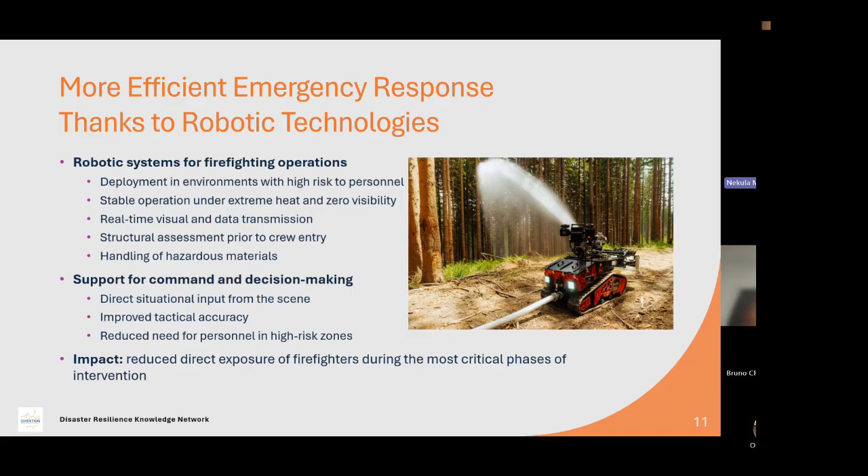I have to say that robots are important for me for two reasons. If I'm thinking about robots which are necessary to set up during interventions, I am sure that we need, for our better idea and better working at the scene, two different platforms of robotic systems. The first platform is a small platform with possibility to have real-time visual and data transmission, also possibility to see by camera and thermal camera.

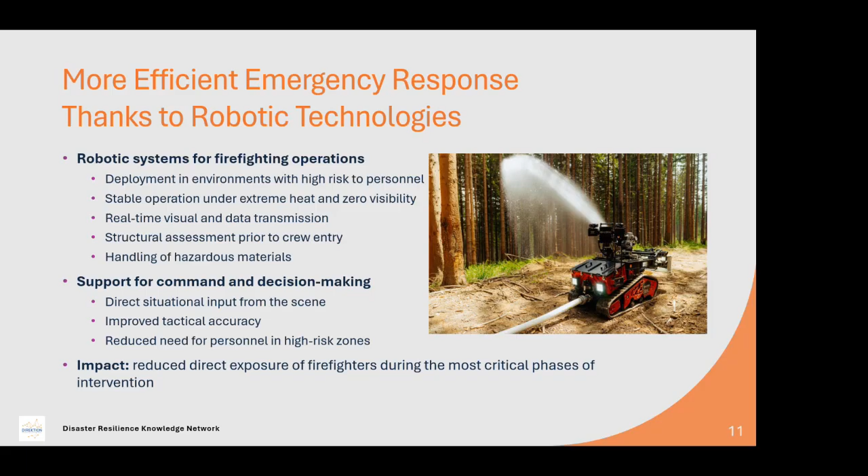And after that, use also the bigger brother - for example, a robotic system which is able to support the deployment of units by possibility to have a big nozzle to extinguish fire, also move obstacles, and try to improve or support moving, for example, injured people, and other tasks which are not able to be provided by the small robotic systems.

For us, it means that we try to do our work by clear operational and economic value. It means that we try to save time, reduce damage by fire at the scene, have lower risk for firefighters, and also try to have feedback from new data capabilities. It means that if there is data or possibility of pictures, and we are able to accept these pictures, we are able to bring better understanding of the situation.

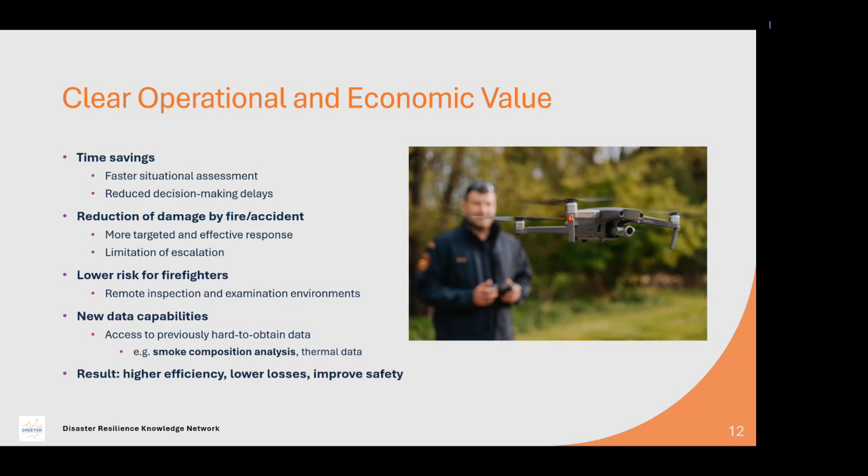We use drones during our interventions. It's standard this time, and I have to say that during the time we are trying to develop or improve our responsibility and cooperation with robots, it looks very good because in many interventions we are able to better do coordination and development of, for example, cooperation between drones and robotic systems.

We try to set up autonomy of the data system because we are aware that it's dangerous if the system is open to outside sources. So we try to set up a system covered by a special system with accessibility only into our net, and not possible to have an impact from outside on our net. This is the reason why we are very aware about the dangerous situation that can be caused if somebody is trying to reach the information and data we have during an intervention.

Of course, we have to be able to challenge new possibilities, have a special idea how to cooperate between drones and robotic systems, and have not only a view of the picture from the air, but also how people can see the situation around us. So every piece of information is connected to one system and presented to a commander for a better idea of the situation. It brings solutions, and most importantly the results mean that we are flexible and resilient. We have robotic systems and drones which are also resilient, meaning we can better support all emergency situations and operations.

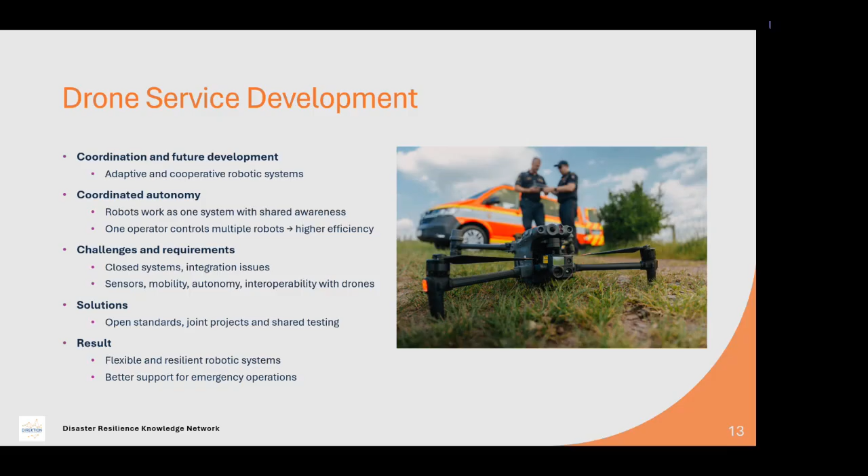Our current technology used by the Fire Rescue Brigade of the Moravian-Silesian region is that we use 35 drone pilots with this equipment. We use drones for training, for intervention, and also cooperate with different departments who are responsible for using them. If somebody needs to investigate a situation at the fire or after the fire, they use a special part of that equipment. If we try to get a fast track or fast picture of the situation, we use a slightly different one. If we need analysis inside buildings, we use a special construction of drone to be able to use it inside the buildings.

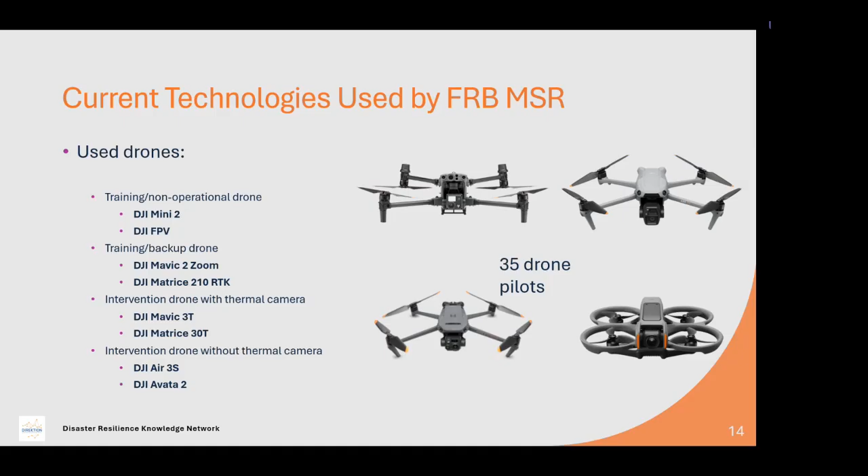What is the idea to improve our situation now? We are currently responsible in the area of drones, but we are not able to support our intervention with robotic systems - robots able to move on the ground and bring the same feedback as drones. Now we are thinking about two platforms. We would like to have a small one with camera survey and thermal camera, and a big one with the possibility to transport material, extinguish fires, transport injured persons, load special equipment, and push or pull obstacles. Beside that, it's necessary to have also a small one with the possibility, for example, to load a bottle, as you can see on the right picture.

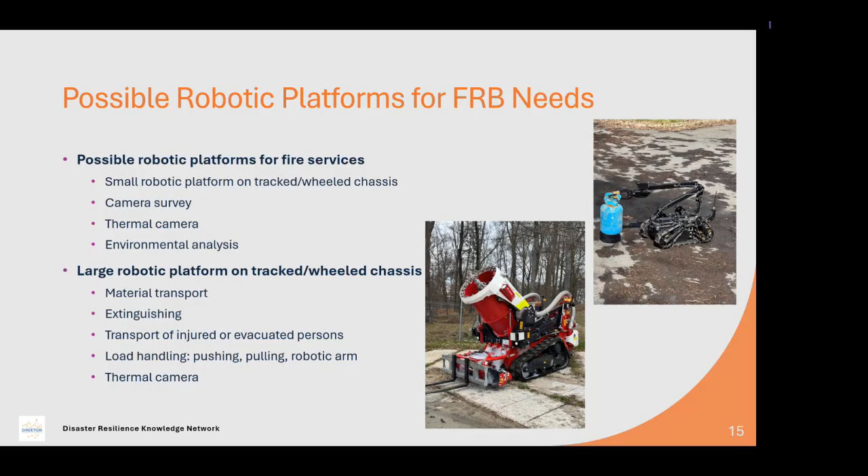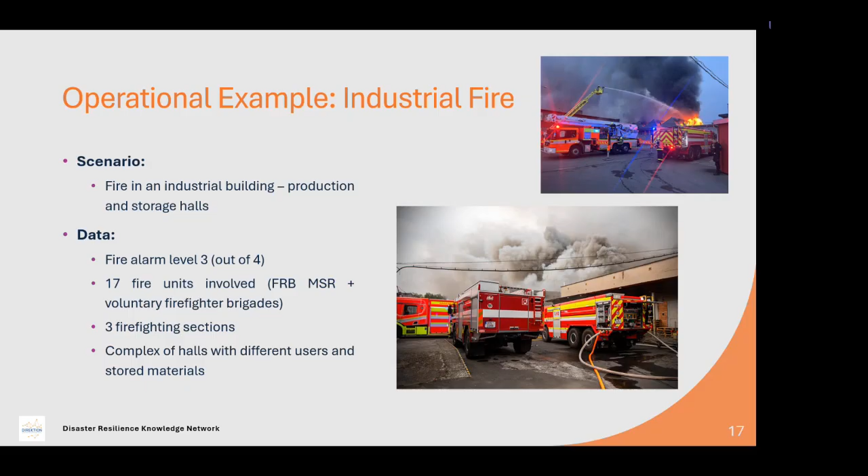I have a few examples of how to improve or do better in deployment of units with robotic systems, because we had a few interventions recently when the situation could have been supported by a robotic system. On only one occasion did we use a robot from colleagues in Slovakia to support fighting a fire, which I will also show in this presentation. But the first example I'll present is an industrial fire - we had a fire in a storage hall with 17 fire units responding. The place was separated into three firefighting sections, and this is the main reason we needed pictures or analysis from drones - it brings a better overview of the situation.

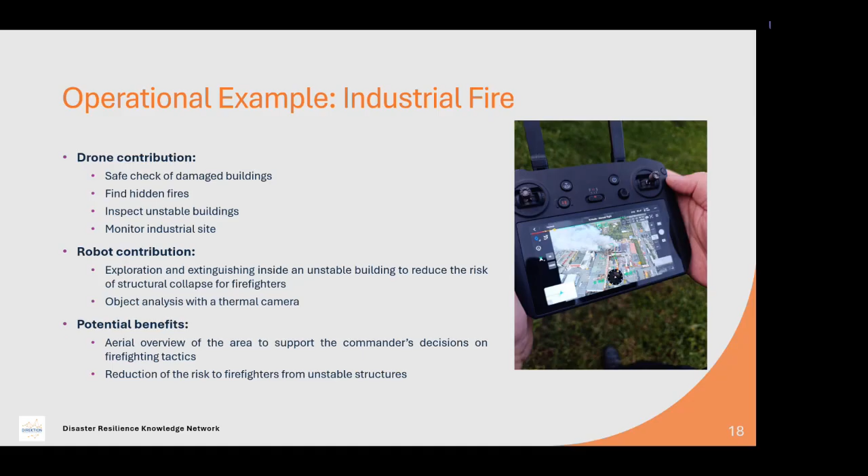What could be the contribution of robots? If we are able to explore these robots at the scene, we can be more successful in increasing the possibility of safety and security of that intervention. Also, unstable buildings can be dangerous for firefighters, and robots have a possibility to move something without firefighters needing to reach the people in person. These are the reasons why we think the robot is needed.

Another example is a forest fire, when we had 19 fire units involved, also drones at the scene, but no robotic system. In this case, the robot can bring an idea how to move nozzles, how to move hoses at the scene, and make it possible to continually extinguish the fires in cooperation with firefighters at the scene.

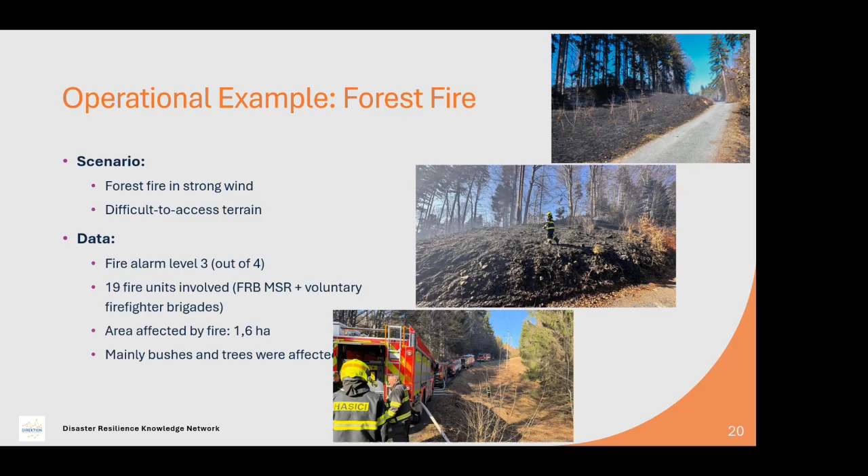When we use drones, we have a possibility to predict the situation, for example with wind, or to have an idea about moving firefighters at the scene. It also supports people who don't know about the situation and who are able to reach some place at the scene, supported by drones.

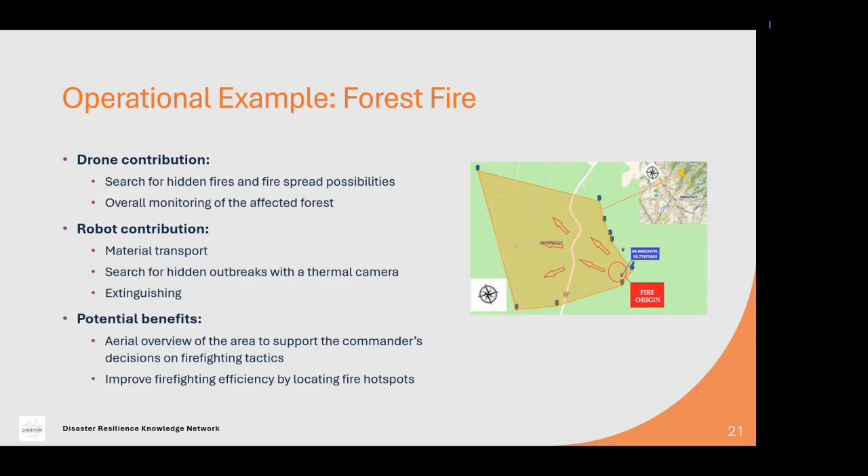We know that if we can also use robots, we can use them for transport of materials, searching for hidden places by thermal cameras, and also for extinguishing fires.

A situation with a huge fire of benzene was supported by drones, and after our request to colleagues in Slovakia, it was supported by the Shark system from our Slovak firefighter colleagues and these robots. There were 38 fire units and the situation was very dangerous. That was the only way how to continually check the temperature of the benzene in the tanks and have continual information about the situation. That was very important, and that's the reason we were able to support our firefighters with robotic systems.

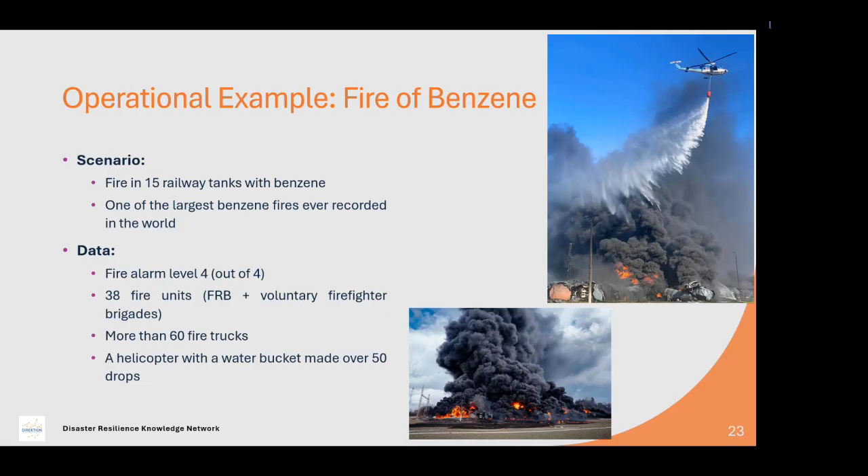After that, beside the thermal camera inspection, we used drones for overall monitoring of the situation, and the robot at the scene was used for transport of material. The benefits are visible: the firefighting robot was used to reduce risk mainly for firefighters.

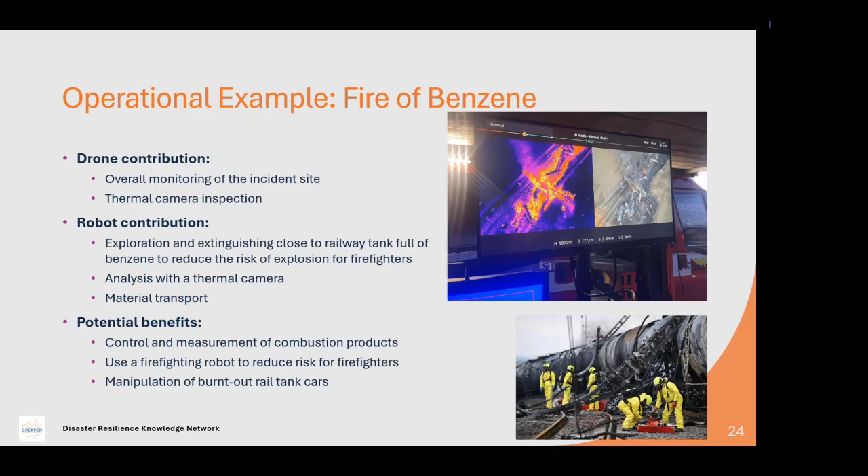One example, and a question for me and also for providers and producers of robotic systems, is the idea of how to provide deployment of units in connection not only with drones but also in connection between drones and robotic systems.

Beside that, we had a huge fire in a complex of buildings. There were 28 fire units, and the problem was that we had to cut the roof of the buildings, because under the roof the fire was spreading through holes, and there was no possibility to stop the fire and extinguish it without doing that.

The drone supported the picture and imagination of what happens or what can happen, and how to effectively use units at the scene, cooperating with the possibility of drones.

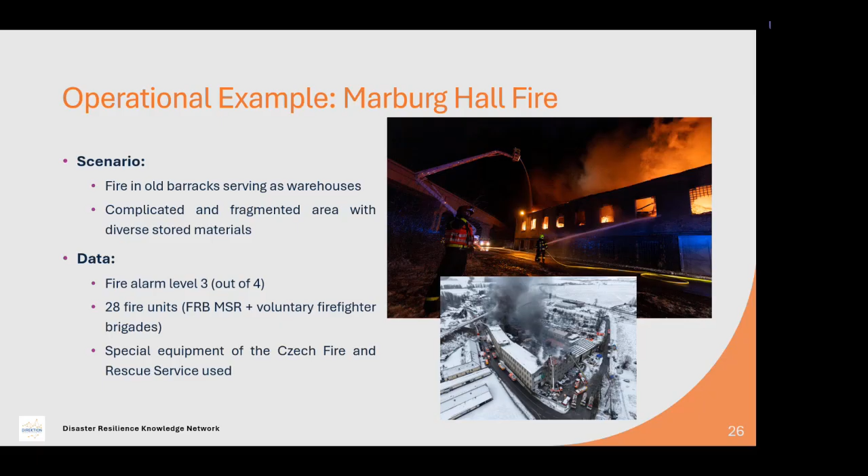Of course we didn't have robots at the scene, and if we had the possibility to set up robots, it could help extinguish fire in the middle of the place between buildings, because there was huge temperature and it was not possible to use nozzles in cooperation with firefighters there. It was only possible to have monitors on the ground and extinguish fires in that place with these static monitors. Of course, robots could help this situation by increasing the use of water and foam in that place.

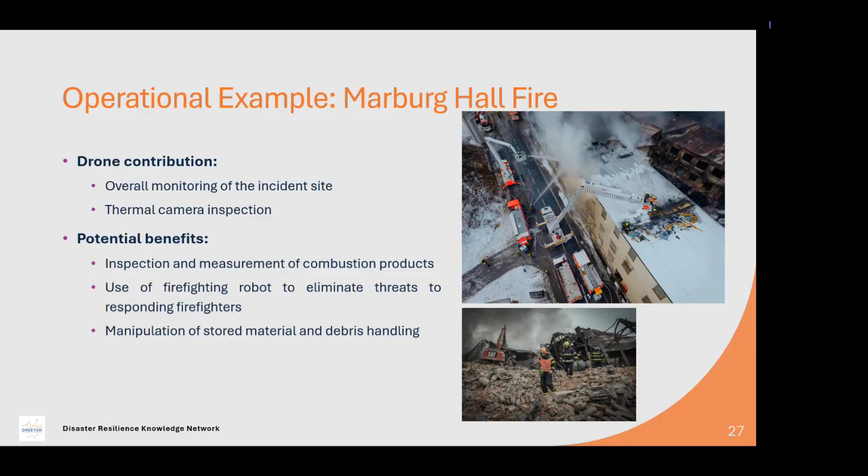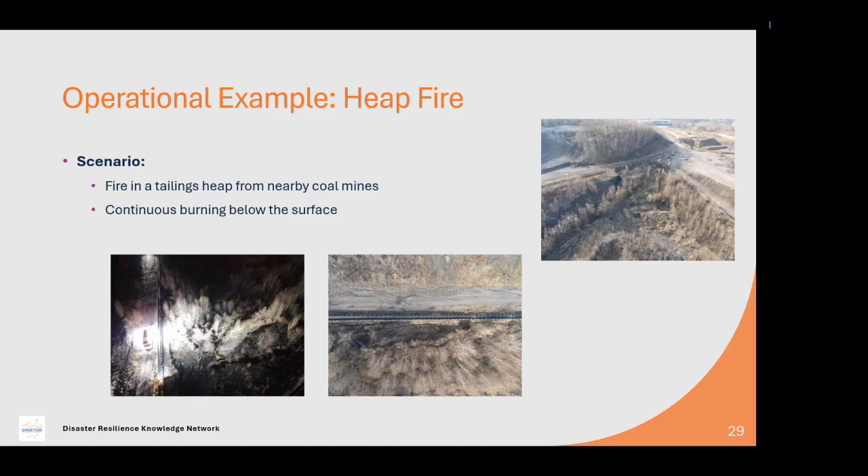The last example of using robots is one place where we have a continual fire of a heap, a fire in a tailing heap from nearby coal mines. It means the fire is underground, and on the surface there is a temperature of 140 degrees, so it's possible to have a fire in that place at any time.

This is the idea of how to cooperate with drones and robots at one place, if there is a possibility to have continuity of drone monitoring, and after that continuity, deploy robots on the ground to use them to extinguish fires if drones are able to inform you about the situation that fire is in that place or another place.

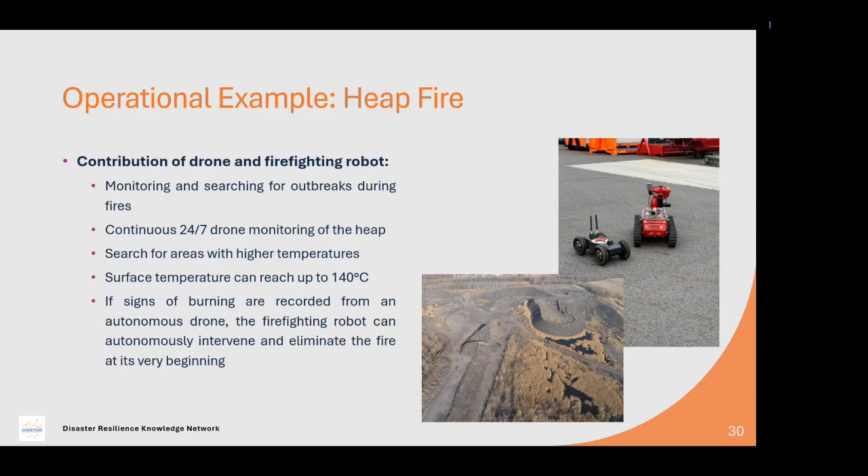Because it's a huge area, it's not possible to deploy the fire rescue service at all times and continually check that place. This is the reason why deploying drones and robots can be very successful also in this place when we have to use firefighters because of fire.

What is the possibility of bringing some new idea for us from providers or developers? It seems that if we try to cooperate between providers who are able to support drones and providers who are able to support robots, we would like to find connection also with some feedback from firefighters.

This is the idea how we can bring something new for fire rescue service, and this is the reason for me in the Czech Republic to bring something new. For example, for fires, for dangers of next fires, how to cover that situation, have an overview, and extinguish fires by drones and robots in one whole system. Thank you, Direction, for that possibility to develop that idea, and thank you for the opportunity to present. Thank you.

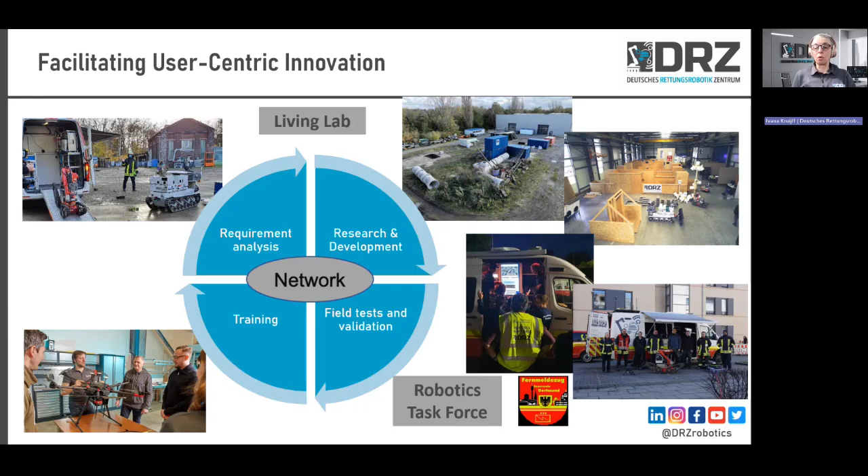We also organize training for first responders, primarily to learn from the experience of others, to build capacities to use robotic systems. And from all these activities, it's a circle, right? We bring it again into knowledge about what is needed, what is not yet solved, and help developers elicit the development of further useful systems. So that's kind of the main activities of DRZ.

And why do I believe that DRZ is extremely important to have? Because, and Martin's talk already showed some examples of that as well, we have quite some innovative concepts and demonstrators available on the research side, and also on the development side in companies. And yet still not all that there is gets into practical use by first responders. This can have various reasons. Not every idea works, but it may also be that the fit for the

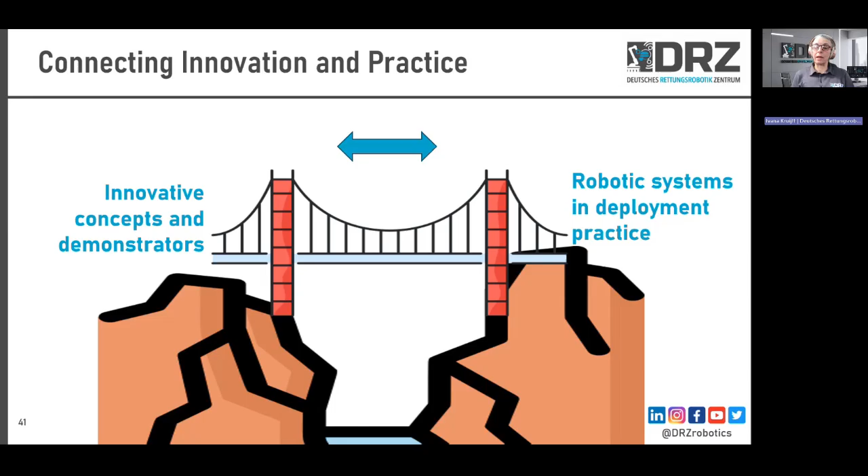operational constraints is not yet worked out, or not as it should be. Or it could be that the training is not available, or that the systems are not doing exactly what they should be doing. That's why we think our work is important to help bridge this gap, in both directions: that developers understand what end users need, and that end users get a better idea of what there is.

Now, talking a little bit about where we are nowadays, it's a big task, because disaster response robotics contains or envelopes many topics. The pictures there show some of the demonstrator systems that we have at DRZ. Martin has already shown many further examples. I just wanted to say, in first responder practice, and again Martin's talk was a perfect example of that, drones are already becoming very common.

I can add that in Germany there are about 550 drone units. The current practice is mostly that drones are used for live images in teleoperations, some partially autonomous missions, but much more is possible.

When UGVs are concerned, Martin talked very nicely about the potential uses and current uses, and clearly the interest is growing. If you're familiar with the technology adoption curve, then we are...

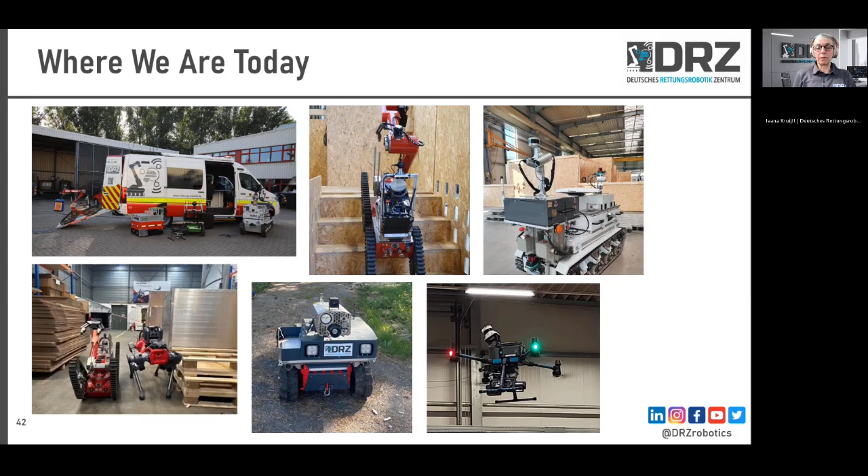There's too much to do a thorough overview in such a short time, but I'd like to get back to this issue of listening to customers - my core message that I want to bring across today: to listen to first responders.

Here I'm borrowing a slogan from Amazon, who are really famous for their obsession with customers - they talk about listening to customers while at the same time knowing your technology and having a vision, bringing these three elements closely together. So I want to talk about some of the ways we work with first responders.

Starting very early in the design phase, it's possible to use methods such as data-sheet interviews, where you present the potential technology being developed and discuss the uses on that basis, or carry out tabletop exercises, as we did early in the Karma project.

This is very useful for initial exploration, but because it's imaginary, there is a danger of being too idealistic on one hand or too skeptical on the other.

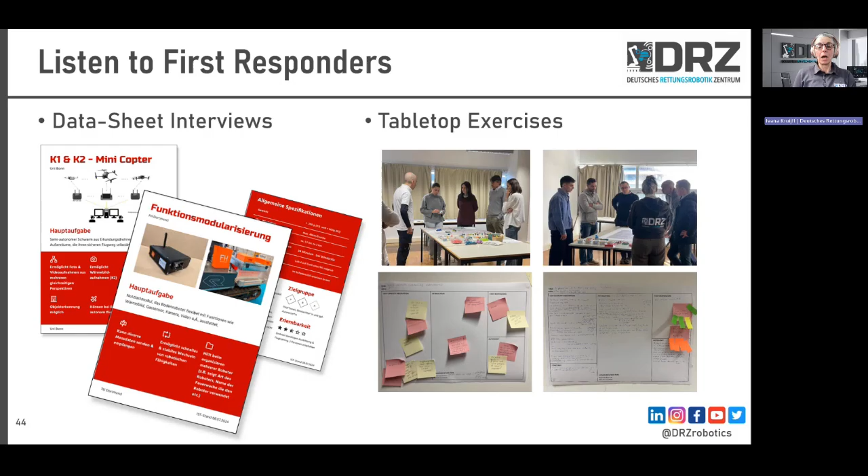In doing these kinds of experiments, there are various ways in which end users and developers can work together. The most desirable mode of operation is that the first responders get hands-on experience with the technology. They are actively using it and actively experiencing it. That is, of course, best.

One has to realize that for this, typically extensive training is needed, so that the first responders really become, some as novice users, but then their experience grows with every run. They need to know some theory and get practical hands-on experience. There is also a danger that when you run an experiment this way, some more advanced features do not get used because the first responders are not yet that familiar with it.

That's why sometimes it's good to do a combination where more experienced users are actually demonstrating the technology, or are kind of accompanying the active use by the first responders by advising them. So that's a little bit when the first responders are just observing the use, then it's a more indirect experience, but it's still good experience, better than nothing, right?

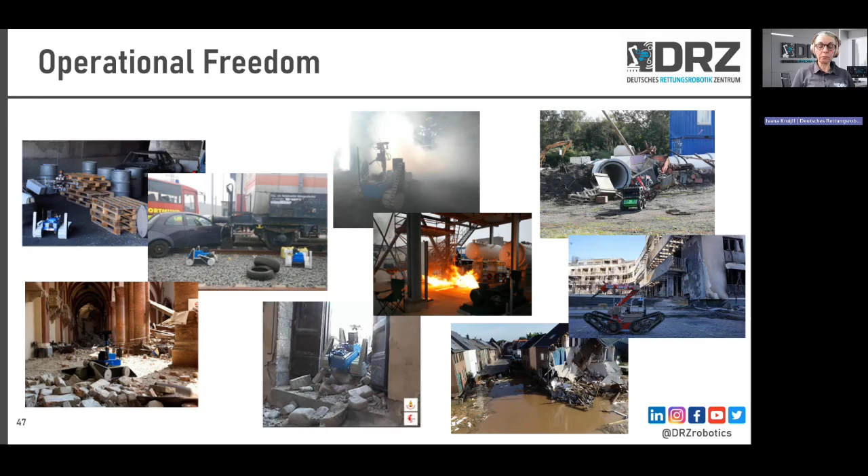So this is much more exploratory. It has the danger that, as I said, some technology may not be used because it just doesn't occur to apply it. But then again, it really shows how systems would be used in a more exploratory fashion at the operational level. And these are the experiences that I wanted to share, the possible ways of working together between research and first responders in a very close fashion, and some of the considerations one needs to have when planning such activities.

So let me repeat once more that the current state of development is that robotics for first responders is progressing, and to a great degree is already available, but adoption remains uneven, and there is room to do much more.

The main challenge from my viewpoint is not only technical performance, but the operational fit. I and some others really strongly believe that real progress requires early and sustained collaboration between developers and first responders, and that practical exercises are very demanding but are essential if we want to make this progress. Let me close by saying our organization DRZ exists exactly with the aim to make such collaboration structured, continuous, and productive, and we are always there to help if anybody wants to apply this kind of methodology to advance their research and development. So thank you for your attention, and I hope I was not too long in presenting.

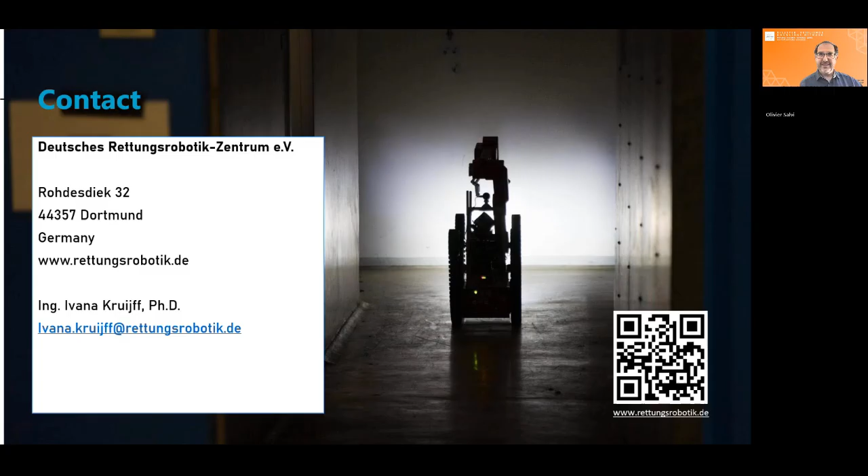And now I would like to invite Bruno Cruchon to turn on his camera and take control. Sure. Hi, yeah, I think I took control. Yeah, let's try. Okay, good, so thank you. Good afternoon, all, it's a pleasure and an honor to be here with you. It's of course difficult to talk after such experts as Mr. Nekula and Ivana, but I'll do my best.

Building on the 10 years experience of Shark Robotics with this simple motto, saving lives through technology. I'm not going to elaborate on use cases because these have already been talked upon. I'm more going to focus my presentation on the way we try to bring useful innovations at scale to end users. And every word counts: useful, because you don't want a robot that talks, that is completely autonomous, that is like a very intelligent machine - you want a robot that has actual added value on the ground. Innovations, because to bring added value you need to invent stuff, you need to have something different from what you could use before. And able to deliver at scale, because when end users order a robot, if it is to be useful, the unit might need more than one. Scale also brings economies, and it's important for adoption to lower the cost of these machines, which for too long have been quite expensive, and we're working on that.

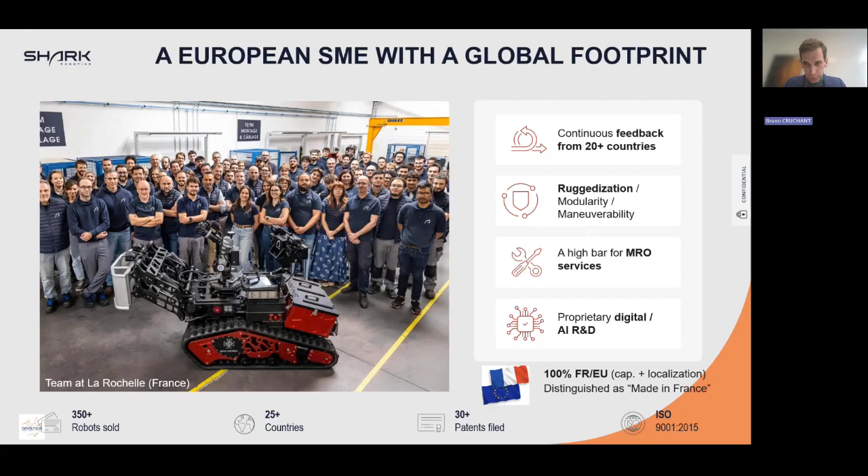Next slide. How does this work? Hop là, just trying to move. Attends... voilà.

Last slide on who we are, but it also shows a lot of what we do with the end users. So we started, of course, with firefighting robotics, the main one, the Colossus, which some of you might have seen, might even use. We developed then a smaller one, like the little brother, called the Rhyno Protect.

So the first one was designed through a partnership with the Paris Fire Brigade, who is still one of our main end users. Then in 2019, you might have heard of that intervention of the Colossus in Notre Dame, where during the fire at the cathedral, it was actually instrumental in containing the fire inside the building.

Then we extended on dual-use stuff, on law enforcement, military, etc. And I'll talk more about what we do in Ukraine with an upcoming joint venture there.

So the link between this slide and the previous one is that what you don't see on these slides is the robots we stopped making, because of course over our 10 year history, we didn't build only 5 or 6 robots, we tried much more. Robots for CBRN threats, robots for petrol, oil and gas exploration, etc.

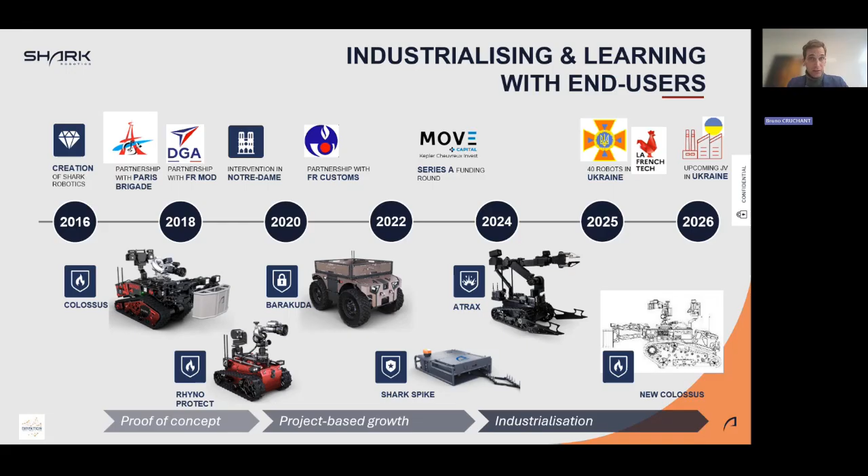But we decided like 3 years ago to be more efficient, to be more targeted. We kept only some platforms, and just to do them better and to lower the cost of those platforms. So hence, we are working in a modular logic.

You know, you have one Colossus, but then each end user has different needs. So you can put, of course, the water cannon, the video turret, but you can also put the stretcher to evacuate wounded people. You can also put the breathing apparatus system to get into thick smoke.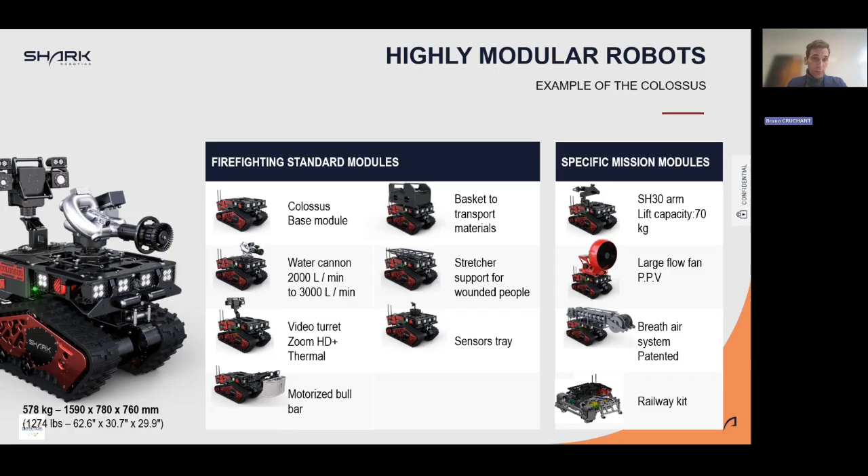And we just invented a thing that I'm quite proud of, which is the railway kit. So it's an assembly of aluminium pieces that in less than 10 minutes is going to allow the robot, the Colossus that you saw, to go from a road to railway tracks.

Hence, you're bringing firefighting capacity and also firefighters on trolleys, at the deepest of tunnels. Because tunnels, if there's a fire that catches inside, they can crumble down within an hour if there's no strong intervention inside. So you're losing the whole infrastructure. And of course, the firefighters take enormous risks.

So to allow firefighting intervention, we invented this that will bring the robot long range. We changed the transmission system to military grade transmission system if that's needed, and you can go like 4 kilometers away inside the tunnel to bring water, foam, to bring back intelligence, etc.

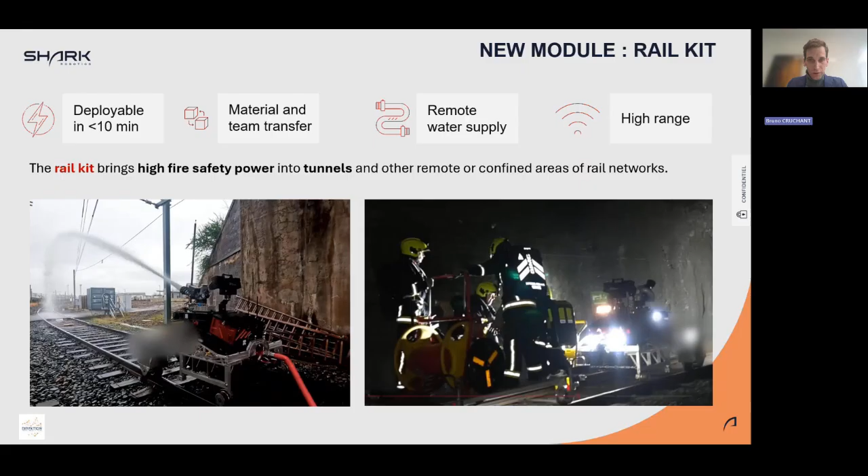To build a case for innovation funding for them, not for us, of course. And they need letters of interest from fellow colleagues, not only in France but across Europe too. So I want to transmit that message for our partners in Lyon.

What we do in Ukraine, well, it's pretty simple. We delivered on a French grant that was a diplomatic support from France to Ukraine. We delivered 40 Colossus. And when I said at the beginning that we are able to deliver robots at scale, well, we delivered those 40 Colossus in 5 months.

And they are active every day across Ukraine, from Odessa to the front line. And so, of course, we're going sometimes into Ukraine. I went myself twice in the last 4 months to Ukraine for a week, and we met the firefighters there.

And quite frequently we see online, well, just as our other end users do, they post the pictures online, but we are quite proud to see that they actually are used after the drone strikes, whether on residential areas or on oil and gas depots, energy facilities, etc.

This is clearly an example of what I was saying at the beginning: our collective innovation on rescue, on security tech, supports people whose life is at stake, not only firefighters, which was our core mission. As a company, we are very proud of supporting the resiliency of the whole country, doing our small part to do so.

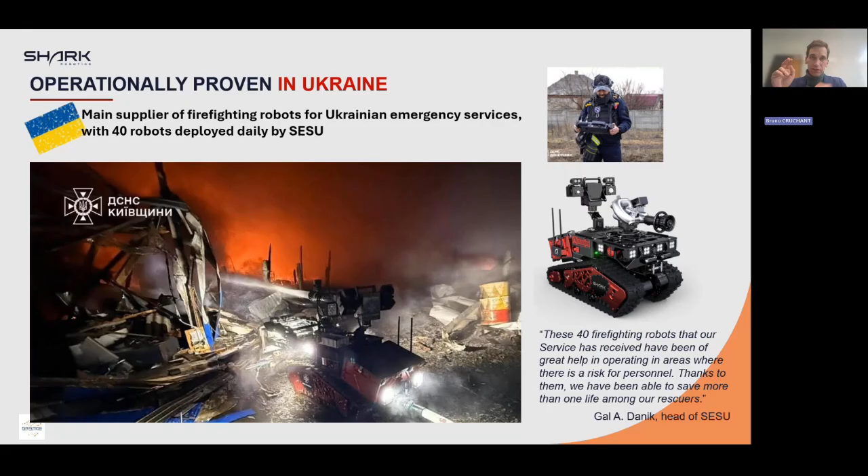Last but not least, on the recent innovations, it's interesting for you to know that both the Colossus and the Rhyno Protect have evolved over time. Basically you have a big one, but not so big, it can go in a van, etc., and a small one. But as apparent in these figures, the small one is actually being beefed up a bit, while the Colossus, the very new one that's going to be commercialized from this summer, has accelerated too.

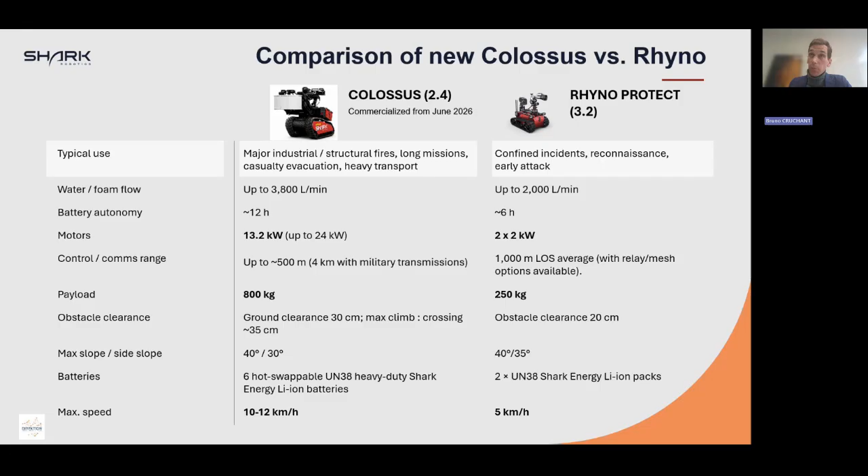So it can go now beyond 10 kilometers an hour. It's very agile with a suspended track system. And we put, at the request of Ukrainians, military-grade transmissions, which is very convenient, for example, if you go into the deepest of an underground parking lot.

Then it's important that the transmission can go like at minus 3. So here I did a small slide because after some time in the company, I was a bit perplexed between the talks sometimes of engineers that dream of this very multifaceted product that could do anything, and what end users actually think matters.

So on the very last Colossus that is going to be commercialized very soon, we delivered some small innovations, or stuff that looks small, but that together are a game changer, because they make the robot more simple to use, more mobile, and more autonomous.

You can adjust remotely the water valve. You have this long military transmission. We're starting to put some AI, not on the Colossus yet, but we're working on that in the lab, and on the Rhyno it's done now. I'll do that on the next slide.

A very simple but tricky thing: we now have batteries that you can change on the spot. Because your phone, when it's offloaded, when it's empty, you need to recharge it, so you don't really use it. It's a mobile phone that's not mobile when it's being charged. Well, you can't do that, of course, for a robot. It's not what you wish for.

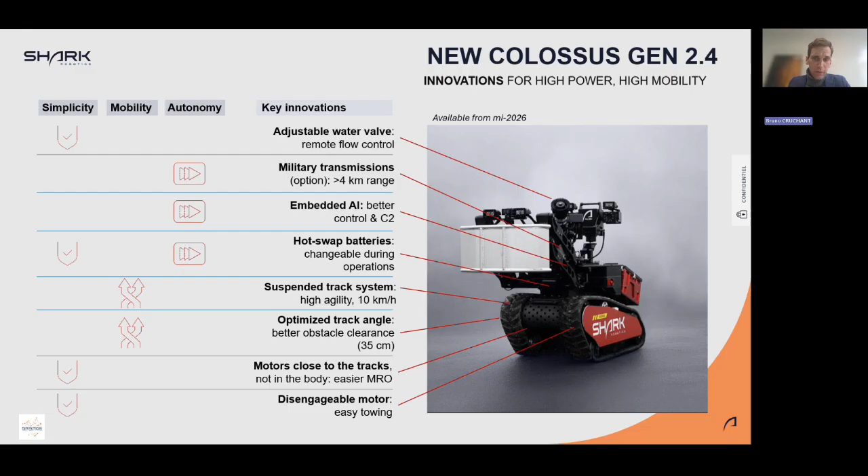And last slide, this same kind of innovation we brought to the little brother, which is also less expensive: a remotely operated valve so that you can control the flow of water, spare water, etc., and advanced internal data logging.

25 times per second, the computer within the robot registers data points from tens of parts of the robot, and that feeds into predictive maintenance. After that, we're going to do the same but with external sensors, to build a model that will interact with the world and that will help the robot, or better, help the pilot control the robot.

And what was very important on that one was that we put a much stronger motor, so that here you have a small robot, quite cheap, that has actually the same capacities as the first generations of Colossus. And I was asked to tell you what were the difficult nuts that we were trying to crack now.

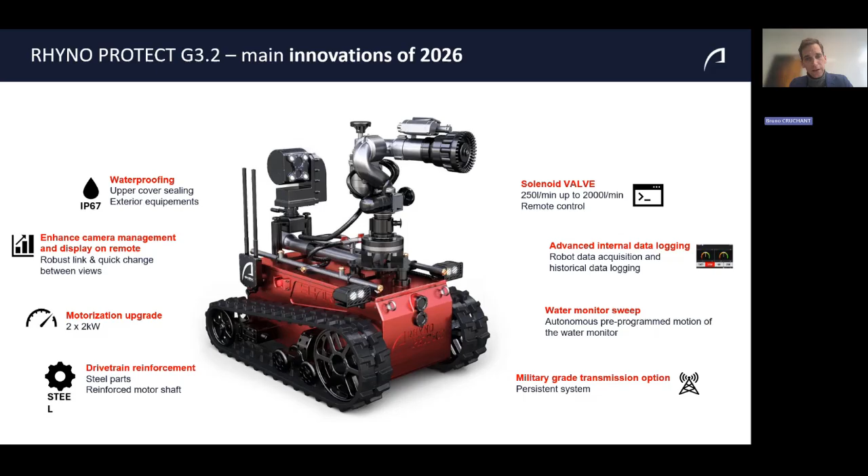So I'll conclude on that: wildfire robotics. We would very much like to be of use on wildfire. Recently we traveled to the south of France. I also held talks with Swedish end users and Canadian end users. I do understand why so far we don't see so many robots on wildfire, because it's very difficult. Terrain is difficult, distances are difficult. We need some sort of autonomy off-road, which is something that even the best companies in the world have difficulty mastering. So we're working on that. We're constantly trying to find where small improvements could be of use on this very important topic for end users and for the whole of society.

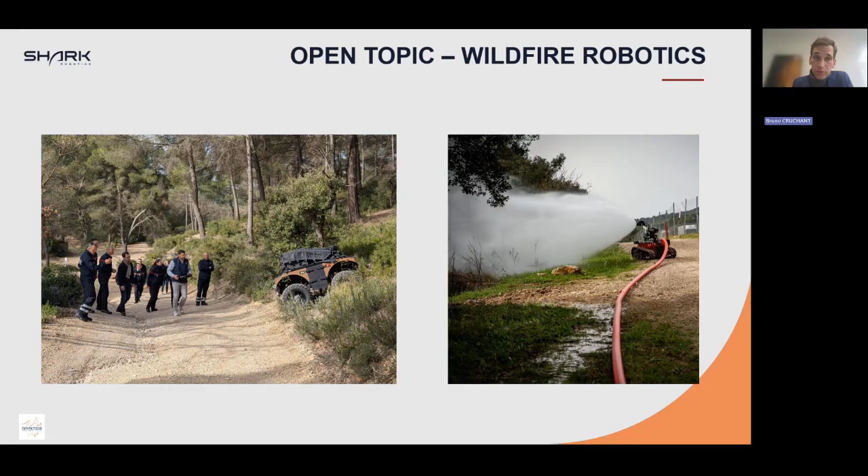Thank you, guys. Thank you very much, Bruno. It was very impressive to see the progress of the company addressing different challenges time after time, and now also this dual use somehow of robots, or the benefits of robots in different situations. Thank you very much, it has been very interesting, informative, useful.